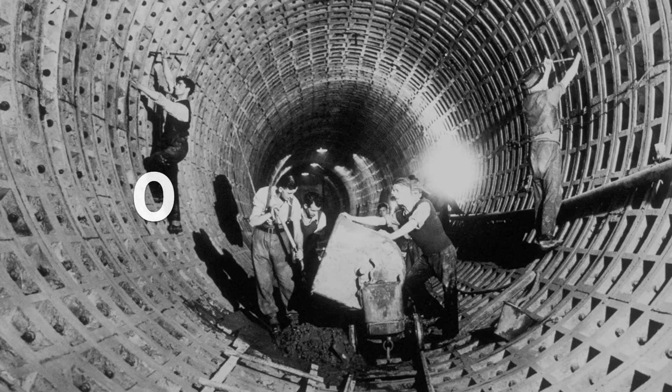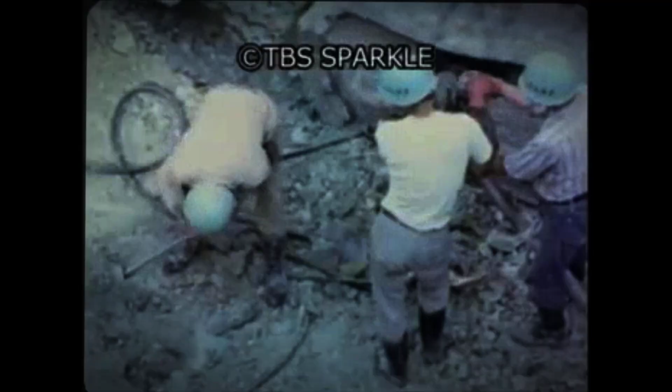Nearly 3,000 tons of explosives, 17 years of drilling, 140 meters beneath the ocean floor. That is what it took to carve Japan's Seikan Tunnel, 53.85 kilometers of railway passage buried under the sea. It stands as one of the greatest feats of underwater engineering ever attempted.

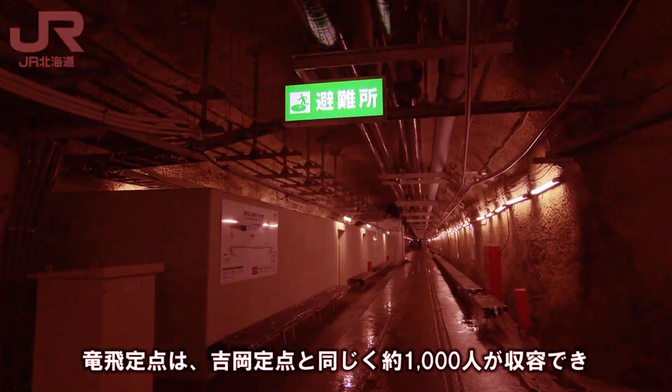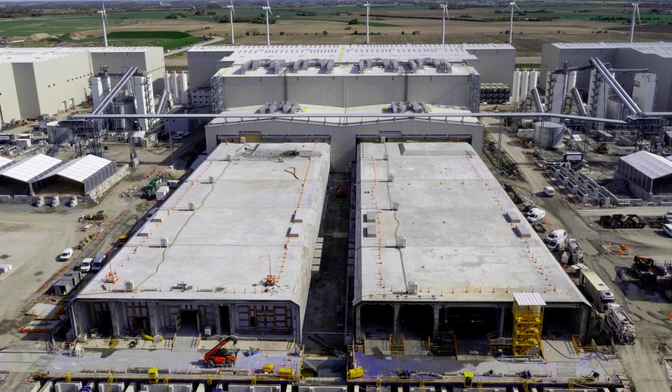But why do nations risk billions building beneath the ocean? And how is a radically new construction method about to change everything? When a country decides to dig beneath the sea, it is rarely just about beating a record or chasing prestige. The stakes are national, sometimes existential.

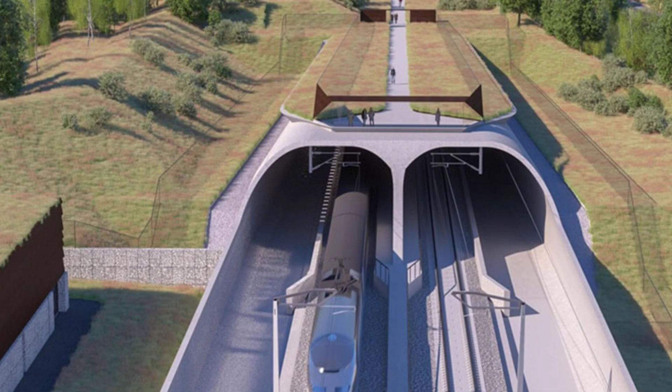Islands and peninsulas, cut off by nature, face harsh weather, unpredictable seas, and the constant risk of isolation. Ferries can be halted by storms or ice, while circuitous land routes cost time and money. Permanent undersea corridors promise a different future, unbroken lines of trade, year-round mobility, and a direct link between regions that once felt worlds apart. The promise of these tunnels is as much about resilience as it is about speed.

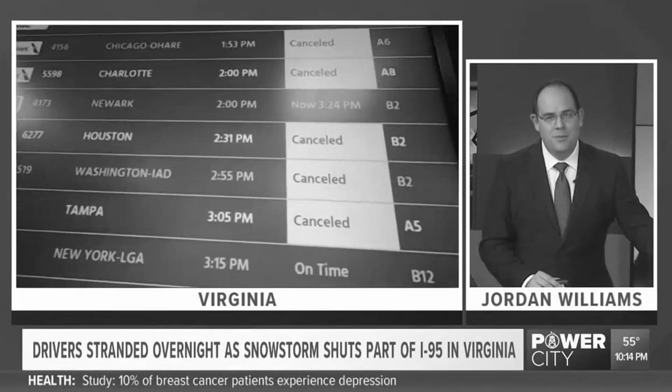A fixed link can keep cargo and people moving when typhoons, blizzards, or high winds shut down everything above water. For countries like Japan, Denmark, and Germany, the ability to guarantee movement no matter the weather translates to economic security and regional integration. Factories on one side of a strait can supply markets on the other without delay. Businesses can plan just-in-time shipments with confidence. Commuters and travelers are no longer at the mercy of the sea, but the impact goes beyond economics.

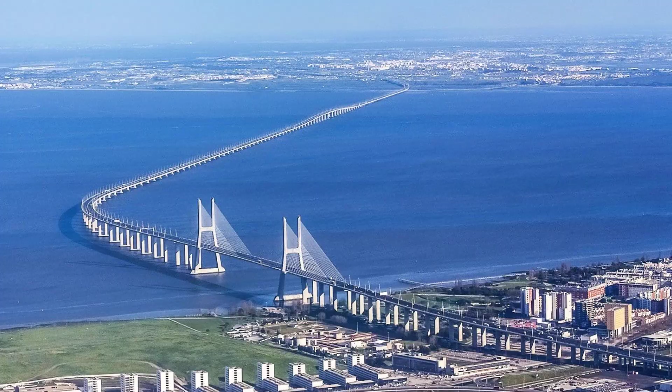Undersea tunnels also offer a path toward cleaner transport. Electrified rail lines running beneath the ocean can draw travelers and freight away from carbon-heavy ferries and short-haul flights. That modal shift cuts emissions, especially as more renewable energy feeds national grids. For governments, the decision to invest billions in these projects is a bet on the future, a wager that the benefits of seamless, low-carbon mobility will outweigh the immense technical risk and cost.

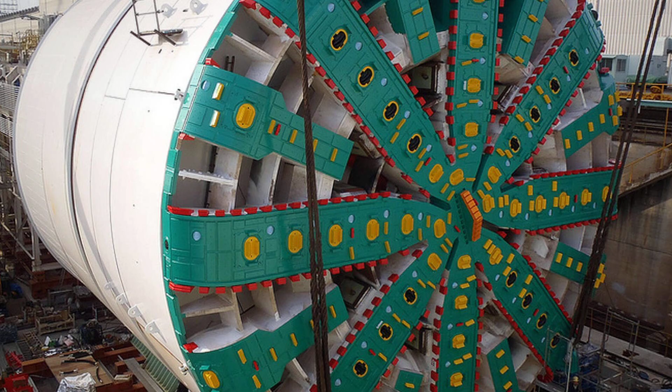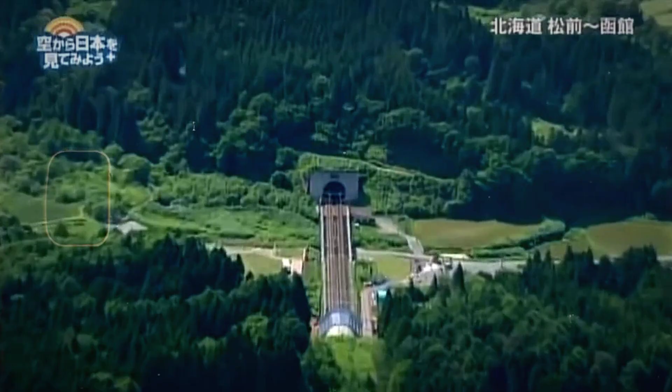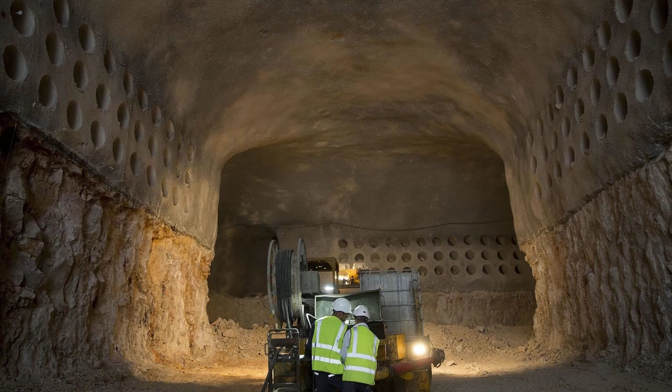It is this mix of ambition, necessity, and environmental urgency that drives nations to attempt what once seemed impossible, forging permanent arteries under the sea where only the boldest engineering will do. Beneath the churning waters of Japan's Tsugaru Strait, the Seikan Tunnel stretches for 53.85 kilometers, making it the world's longest railway tunnel. Of that distance, 23.3 kilometers run directly under the seabed, buried as deep as 140 meters below the ocean floor. The sheer depth and length demanded engineering on a scale rarely attempted before.

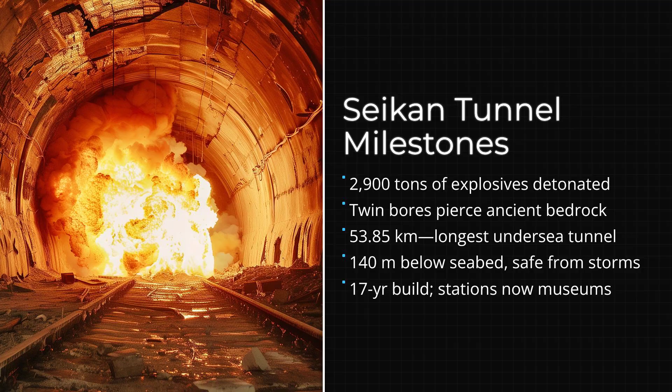Construction began in 1971, and it would take nearly 2 decades, 17 years of relentless excavation, blasting, and reinforcement before the tunnel opened in 1988. The project pushed the limits of what was thought possible. About 2,900 tons of explosives carved twin bores through ancient rock, while nearly 168,000 tons of structural steel formed the backbone of the tunnel's lining and support systems.

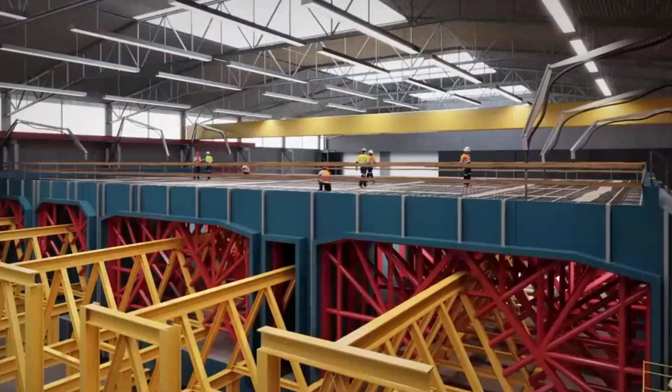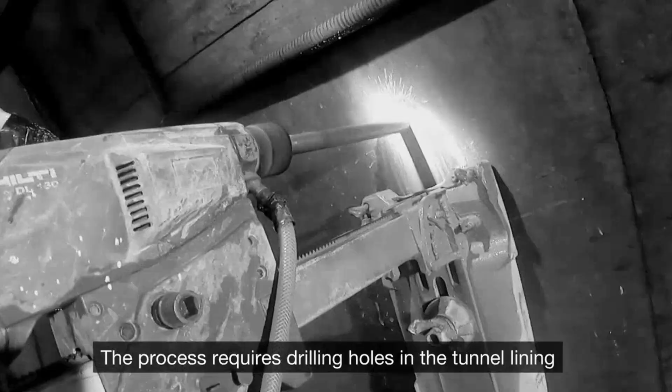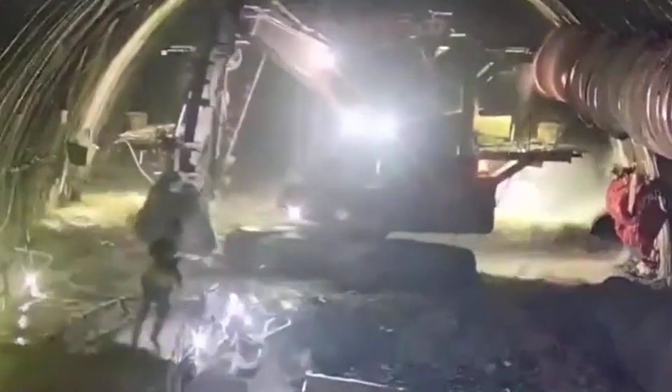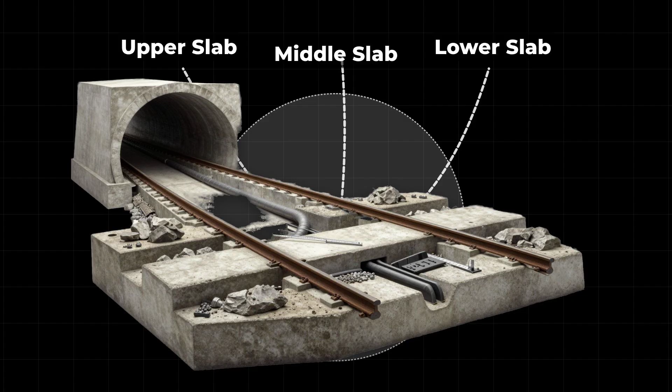Every meter gained was hard-won, with crews battling not just the geology, but the constant threat of water intrusion and seismic activity. The chief tunnel engineer and his team worked around the clock, adapting to shifting ground and pressure spikes that could flood a chamber in minutes. To handle both high-speed Shinkansen and conventional trains, the Seikan Tunnel introduced a triple slab track system, a rare design where 3 continuous concrete slabs support the rails, reducing vibration and allowing for precise alignment even at depth.

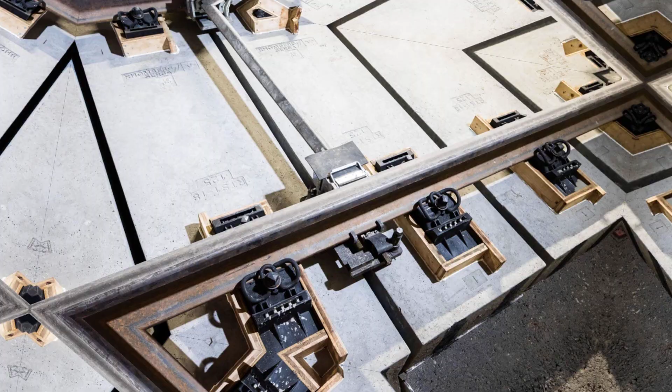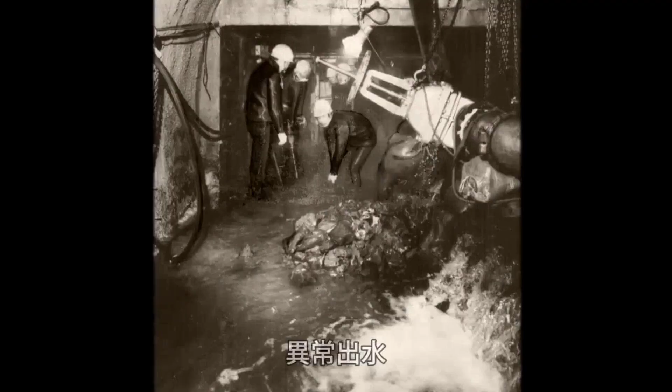Safety was a constant concern. 2 large emergency stations were built deep inside the tunnel, later converted into museums that now display the tools, plans, and personal stories of those who made the crossing possible. Seikan stands as a benchmark for undersea tunnel construction, a feat of endurance, ingenuity, and exacting detail. Its lessons and records would shape every deep-water tunnel that followed, setting the bar for what the next generation of engineers would attempt.

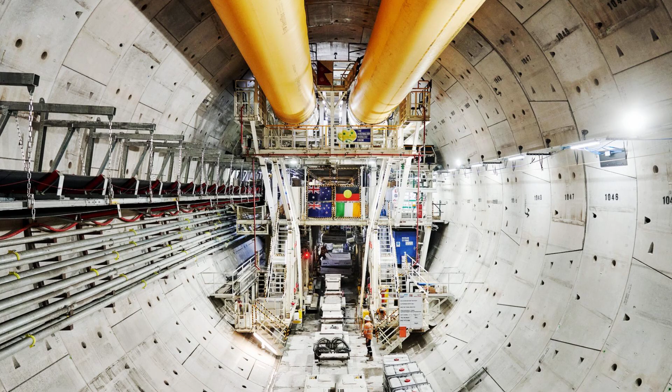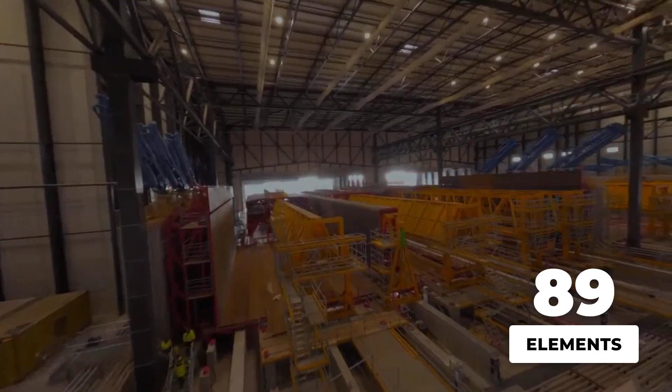18 kilometers of the Baltic separate Denmark and Germany, but the Fehmarnbelt Tunnel will erase that distance in a way no deep-bored tunnel ever could. Instead of carving through bedrock, engineers are assembling the world's longest immersed tube, an underwater puzzle built from 89 massive concrete elements, each nearly the length of 2 football fields, plus 10 special sections for power and ventilation.

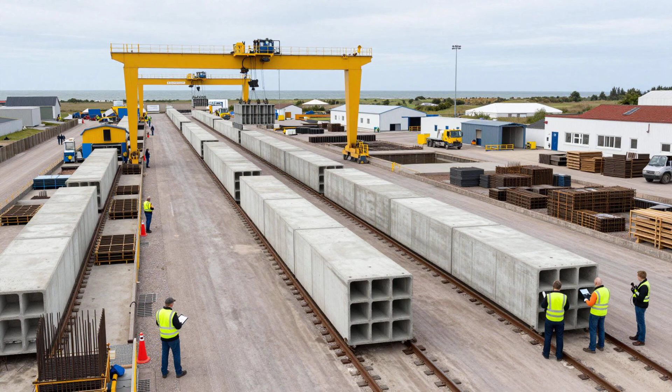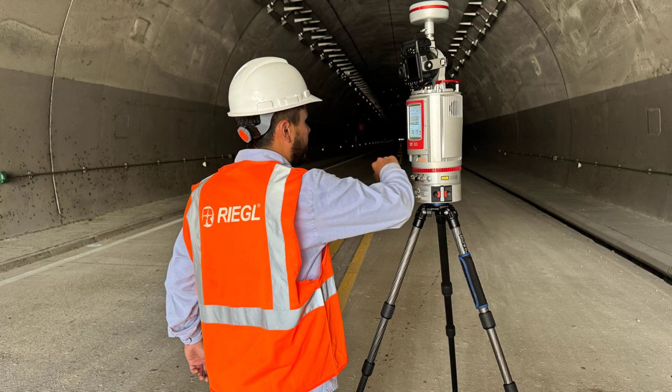At the heart of this operation is a casting yard on Lolland, a sprawling industrial zone where 6 production lines work in parallel. Every few weeks, another 73,000-ton segment rolls out, measured to within a centimeter. Precision leaves no margin for error when these giants must lock together on the seafloor. The journey from land to seabed is a feat of coordination.

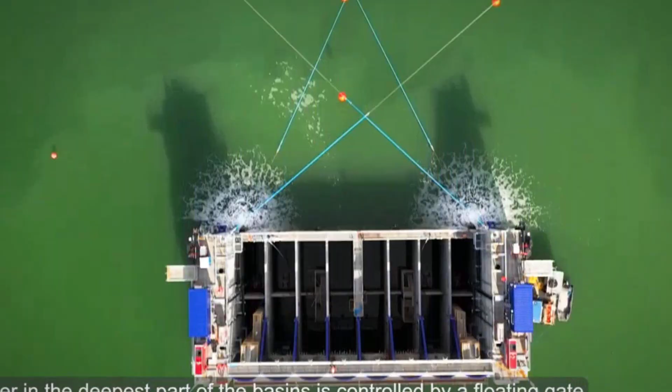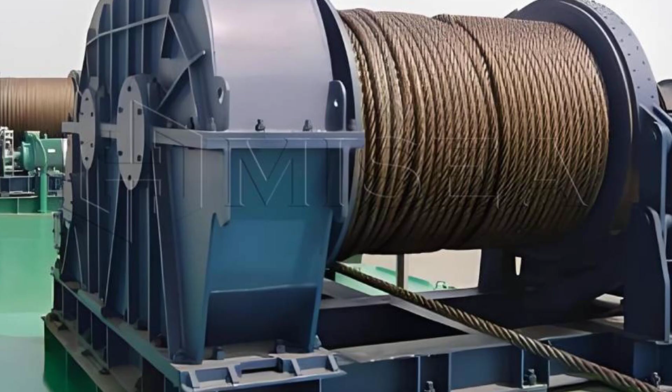Each element is floated out on a custom immersion pontoon, its ballast tanks adjusted to keep it neutrally buoyant. Winches and steel cables, stretching up to 23 kilometers, maneuver the segment into position above a trench dredged into the seabed. Draft sensors and GPS data feed into a control algorithm, guiding the descent at just 10 centimeters per second.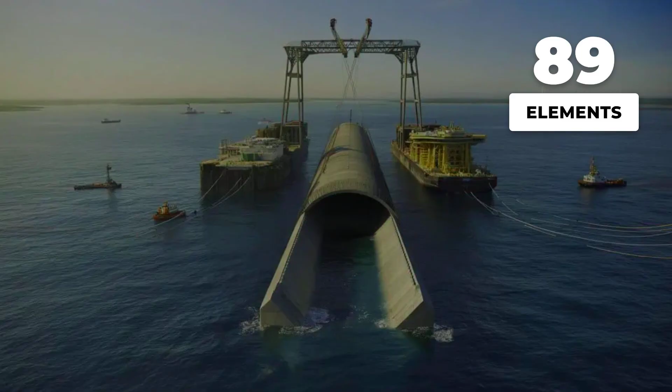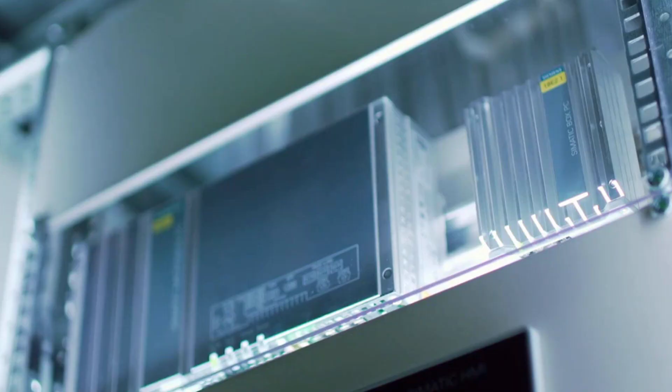The final placement must land within 5 centimeters of the target, and hydraulic jacks make the last delicate adjustments. Once in place, divers and robotic systems seal the joints with rubber gaskets and stainless steel rings, then pour a concrete sleeve to lock everything watertight.

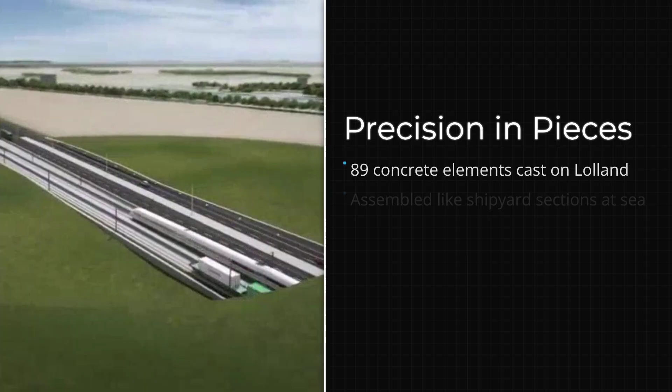The payoff for this industrial choreography is speed and reliability. Where ferries once took 45 minutes, cars will cross in 10 minutes, trains in just 7 minutes. Rail will run at 200 kilometers per hour, road traffic at 110 kilometers per hour.

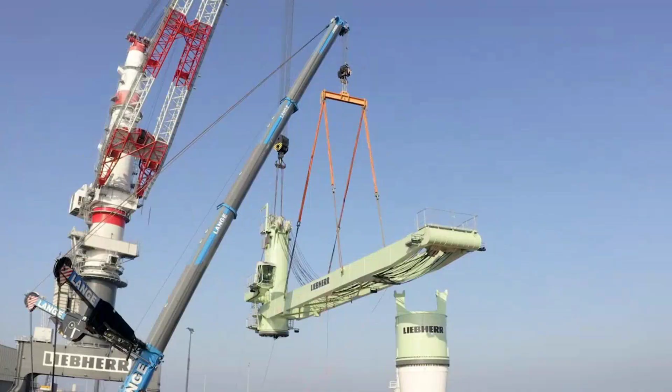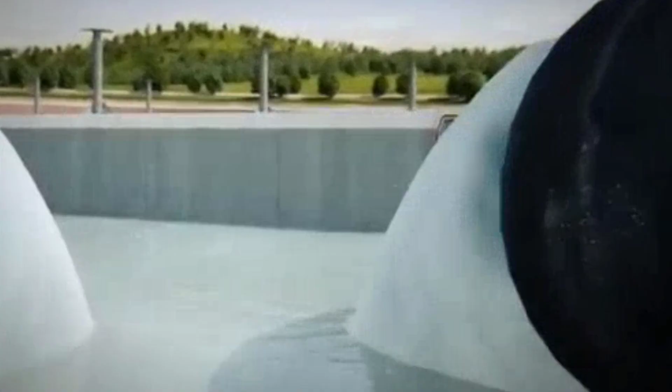The head of element production calls it assembly line infrastructure, a project where precision and repetition replace the slow grind of deep excavation. For travelers and freight, the result will be a seamless, weatherproof link built not by tunneling under the sea, but by assembling the sea's own bridge just out of sight.

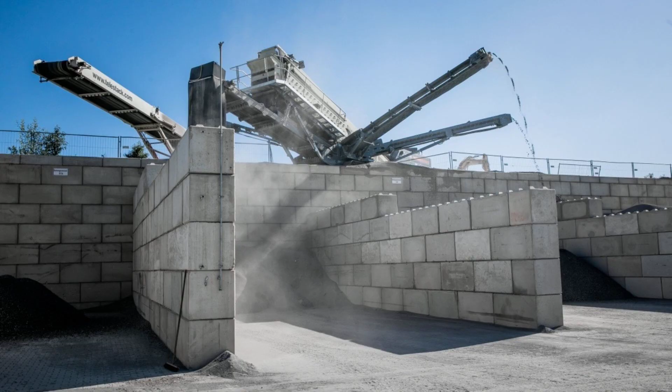A tunnel beneath the Baltic is not just an engineering challenge. It is a financial and environmental test. The Fehmarnbelt project comes with a price tag of 7.4 billion euros, a sum scrutinized by government auditors and the public alike. Every euro spent must deliver not just a faster crossing, but a cleaner one. That is why the team's approach to sustainability is woven into nearly every stage of construction.

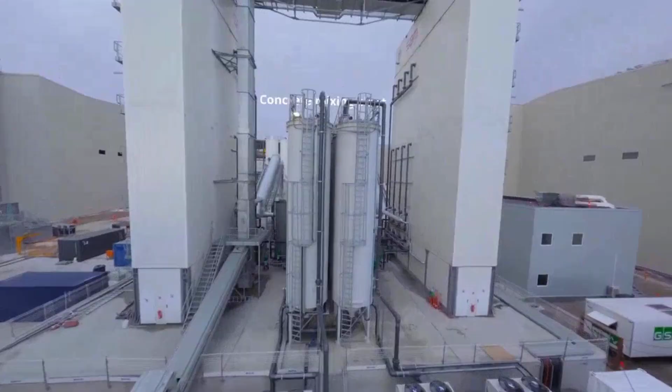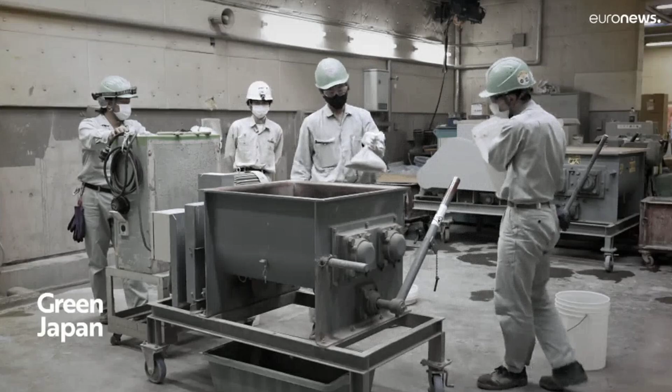On the casting lines in Lolland, the concrete recipe itself has changed. About 30% of the traditional cement is replaced with fly ash, a byproduct from power stations that would otherwise be waste. This low-carbon mix cuts the tunnel's embodied emissions by nearly a third compared to standard concrete. Over the full 400,000 cubic meters poured, that means thousands of tons of carbon dioxide never enter the atmosphere.

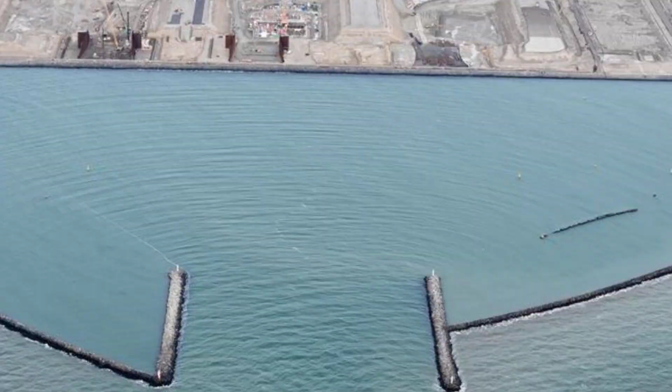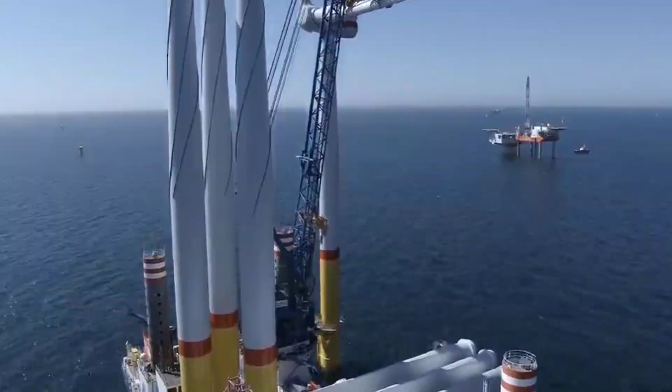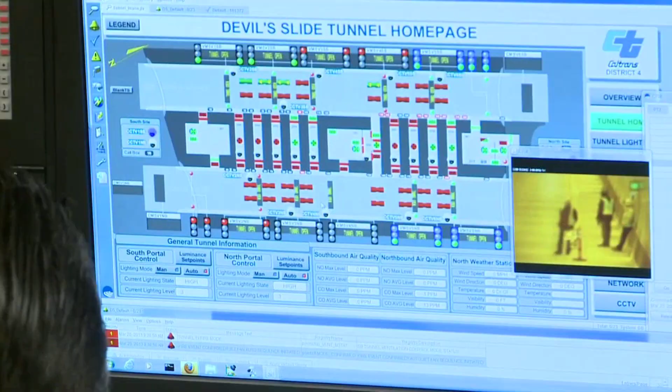The project's sustainability manager describes it as a quiet revolution, one that does not slow production, but fundamentally changes what is possible for megaprojects. Electricity is another battleground. Instead of relying solely on Denmark's national grid, the tunnel's construction sites are powered in large part by offshore wind farms. At peak, up to 80% of the electricity used to drive cranes, pumps, and casting machines comes from renewable sources. The same commitment extends to tunnel operations after opening.

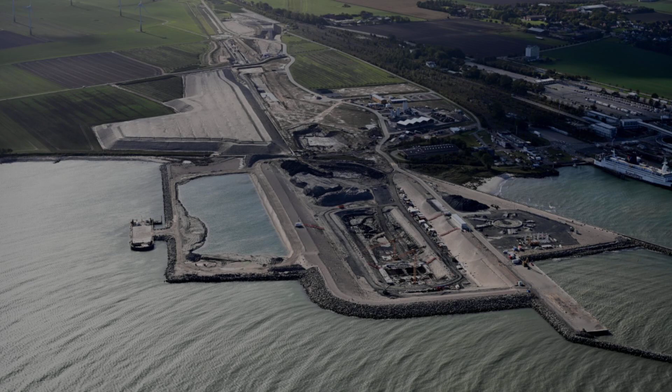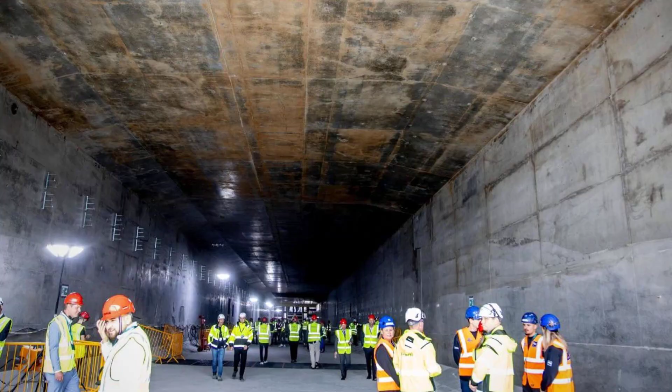The ventilation and lighting systems will draw from a grid where wind and solar make up a growing share, pushing the project toward carbon neutrality over its lifespan. The opening target is mid-2029. By then, the Fehmarnbelt will stand not only as the world's longest immersed tube, but also as a benchmark for how infrastructure can shrink its carbon footprint without sacrificing speed or reliability.

For Denmark and Germany, it is a test case. Can a megaproject deliver on both climate promises and economic discipline? The answer will echo far beyond the Baltic.

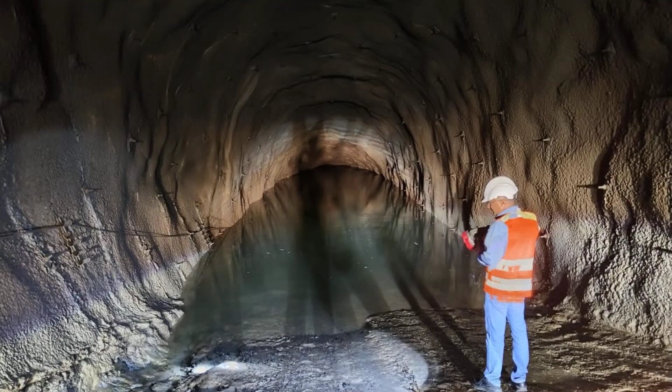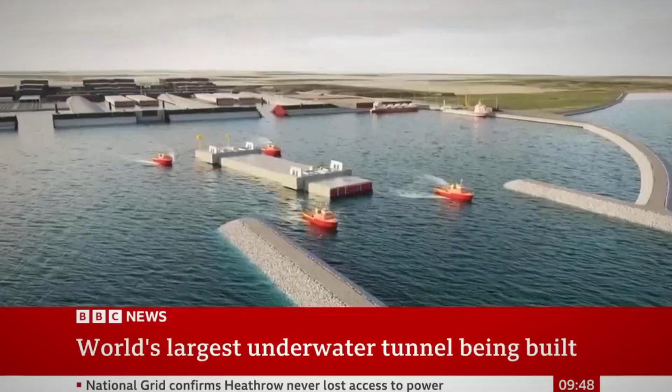Every tunnel beneath the sea is a contest with the unknown, and nowhere is this more apparent than in the way engineers confront risk. Beneath the Tsugaru Strait, Seikan's deep-bored lining faces pressures up to 1.4 megapascals, roughly 14 times the force of a car tire, while the Fehmarnbelt's immersed concrete shells contend with the shifting sands and currents of the Baltic. Both rely on a design safety factor, gamma E, of 1.5.

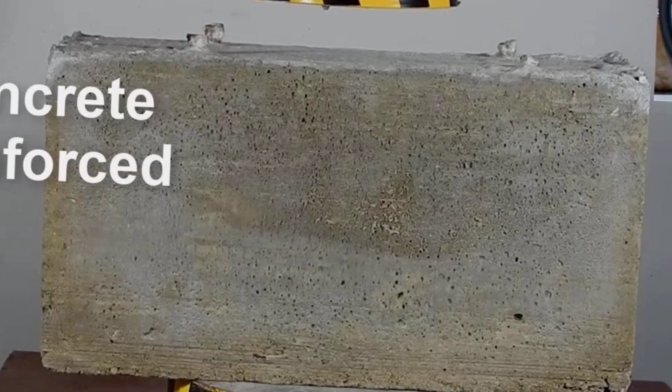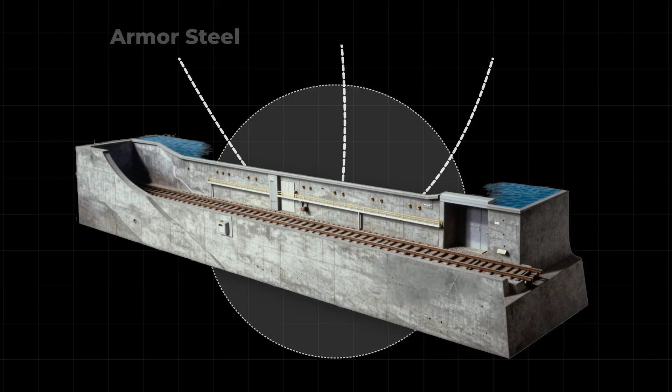Every calculation for water pressure and material strength is multiplied by this margin, forcing the structure to withstand loads far beyond the worst-case scenario. Seikan's chief safety engineer describes the tunnel as a fortress, its triple-layered lining and real-time sensors built for earthquakes and sudden surges.

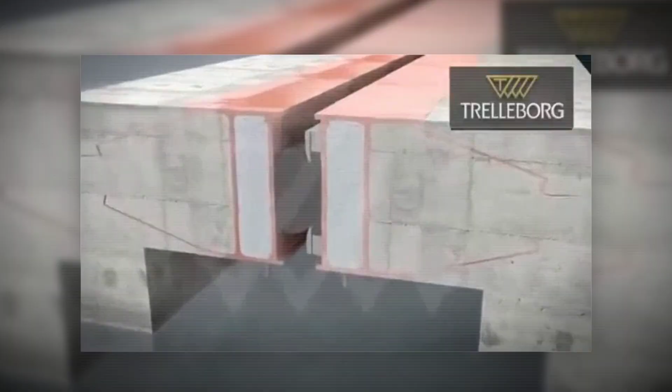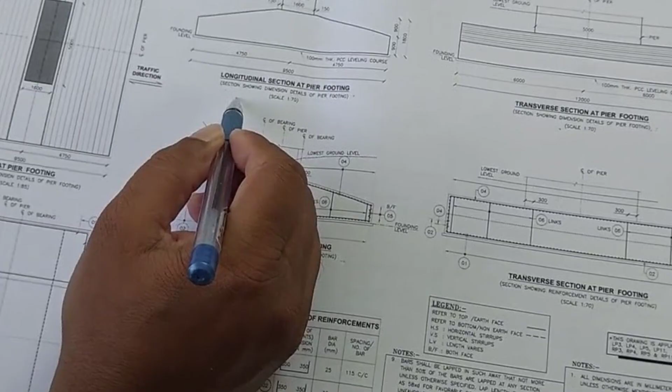In the Fehmarnbelt, redundancy is woven into the very joints. Rubber gaskets compress under hydraulic force, and every element is backed by a secondary seal. Ventilation, too, is double-layered. Forced air systems and backup fans stand ready for fire or blackout. The logic is simple but unforgiving. One failure must never bring the whole system down. This is the partial factor approach, a philosophy as much as a formula, now written into codes from Tokyo to Copenhagen.

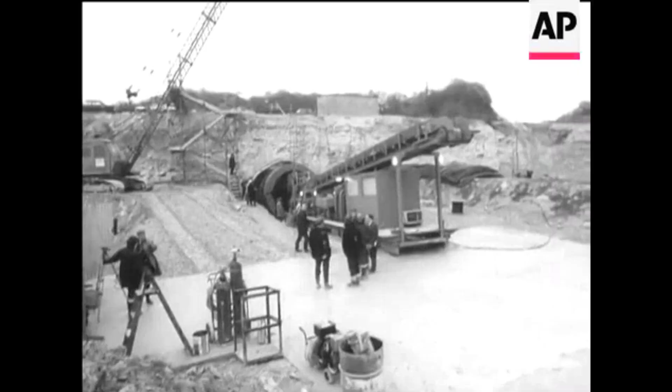The Channel Tunnel, linking the United Kingdom and France, takes a different approach. It is a 50.45 kilometer twin-bore rail tunnel with 37.9 kilometers running below the English Channel. Here, engineers relied on deep bored excavation through chalk marl, creating parallel tubes and a central service tunnel for safety and maintenance.

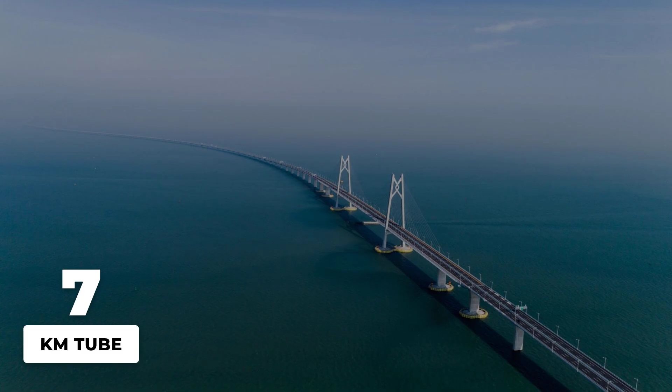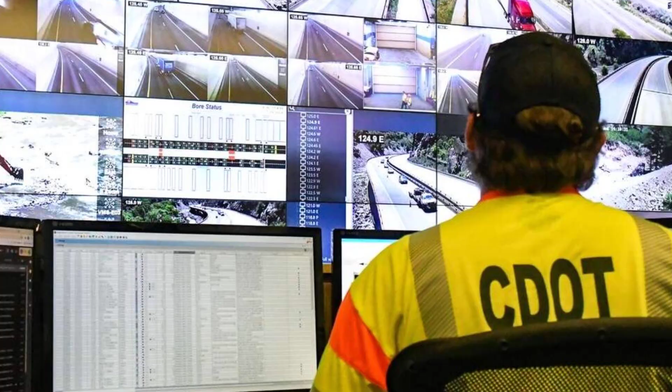In contrast, the Hong Kong-Zhuhai-Macau Bridge features a 7-kilometer immersed tube assembled from giant concrete segments and laid across the seabed to connect 3 cities in the Pearl River Delta. Each project answers the challenge of crossing water with its own blend of technology and risk management, whether boring through rock at depth or assembling watertight segments in shifting currents.

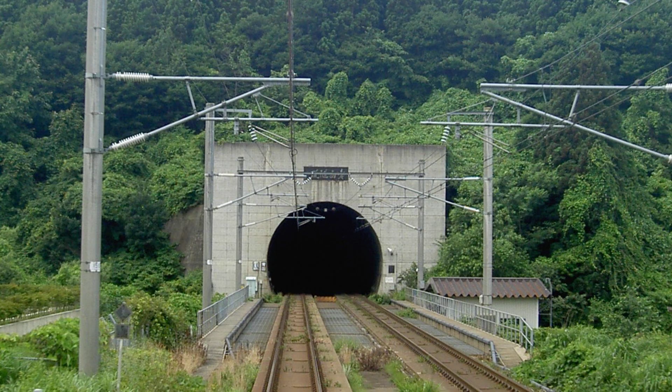Together, these tunnels show that there is no single blueprint. The world's longest undersea links are shaped by geology, traffic needs, and the ambitions of the nations that build them. Beneath over 100 meters of ocean, steel and concrete defy the planet's most relentless pressures.

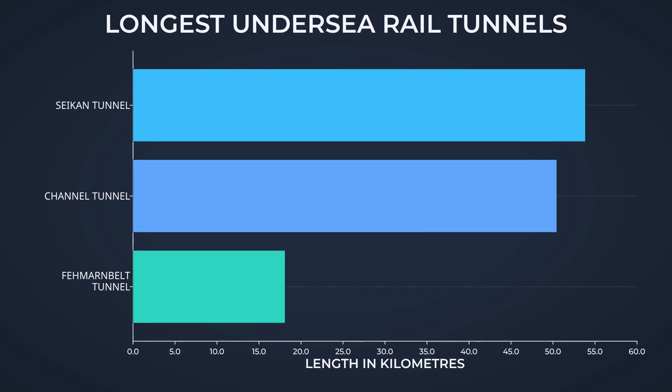As nations push for faster, greener connections, each tunnel, from Seikan's 53.85 kilometers to Fehmarnbelt's 89 prefabricated sections, shows what is possible when ambition meets engineering. The next frontier isn't distance, it's depth. What challenge comes next?